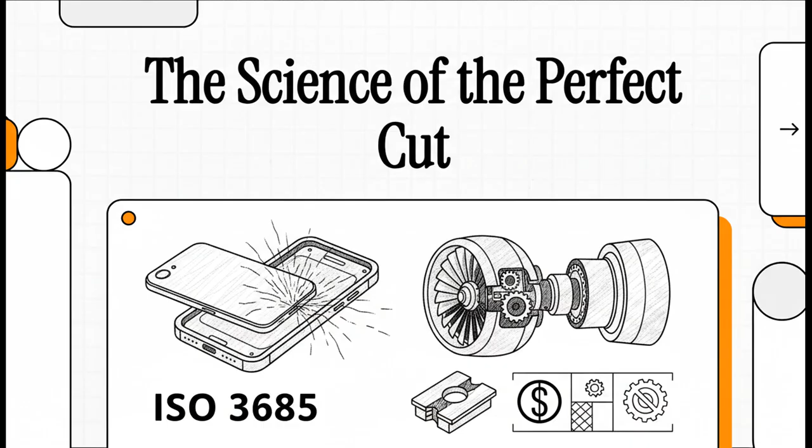So let me ask you something. Picture a huge, state-of-the-art factory. Robots, machines, everything humming along perfectly, making thousands of parts an hour. What do you think is the one thing that could bring that entire multi-million-dollar operation to a dead stop? A power outage? Maybe a massive software bug?

Well, the answer is actually way, way smaller than you'd think. It's a tiny piece of metal. Yep, a single cutting tool that fails at the absolute worst moment. And believe me, that one tiny failure can cause some seriously massive problems.

And this gets to the heart of the issue. When a tool fails unexpectedly, it's not just some small inconvenience. No, it's a full-blown disaster in the manufacturing world. We're talking about incredibly expensive parts getting completely ruined. We're talking hours, sometimes even days of downtime that costs a fortune, and a real hit to quality and safety.

So, how in the world do engineers fight back against that kind of chaos? Well, they use a rule book, a common language that lets everyone, no matter where they are, stay on the same page. And that language, that standard, is ISO 3685. It's the international playbook for defining the life of a cutting tool.

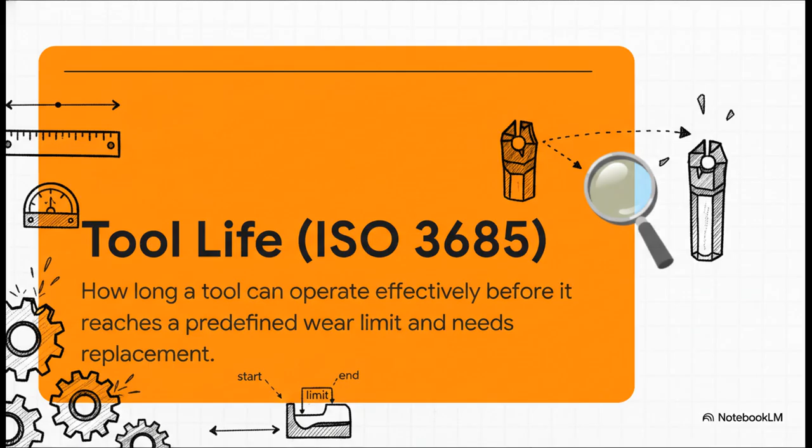So what exactly is tool life according to the standard? Well, think of it this way. It's the measured amount of time a tool can do its job right before it gets too worn out to be effective. And the key part here is that worn out isn't just a feeling or a guess. It's a very specific, predefined limit. And that is what allows engineers to make fair, apples-to-apples comparisons between any two tools anywhere on the planet.

So how do they actually measure this stuff in the real world? Well, they can be pretty straightforward, just timing how many minutes it's been cutting, or maybe they'll measure the volume of metal it's removed. But to get really scientific, engineers measure the physical wear and tear on the tool itself. They look at something called flank wear, which is kind of like the sole of your shoe wearing down, or they'll check for crater wear, which is where the top surface starts to get hollowed out from all that intense heat and pressure.

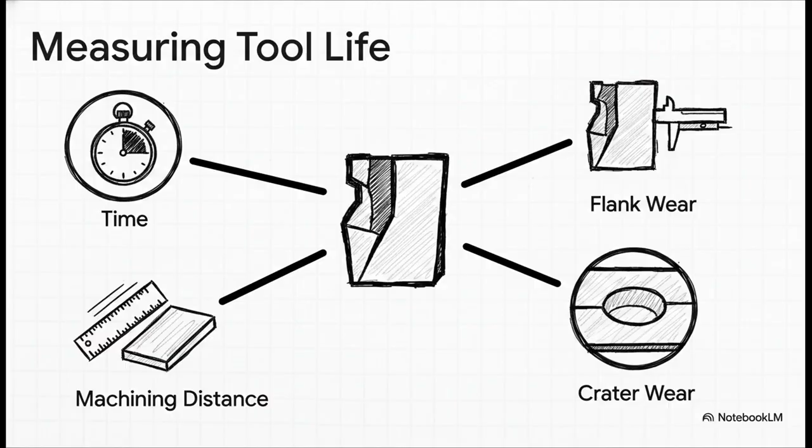Okay, so this is where it gets really interesting. Why does a tool wear out? It's not just one thing. Imagine you're in front of a big control dashboard with all these different levers and dials. Engineers have to get that balance just right to squeeze every last second of life out of their tools. And it really all boils down to a handful of key factors.

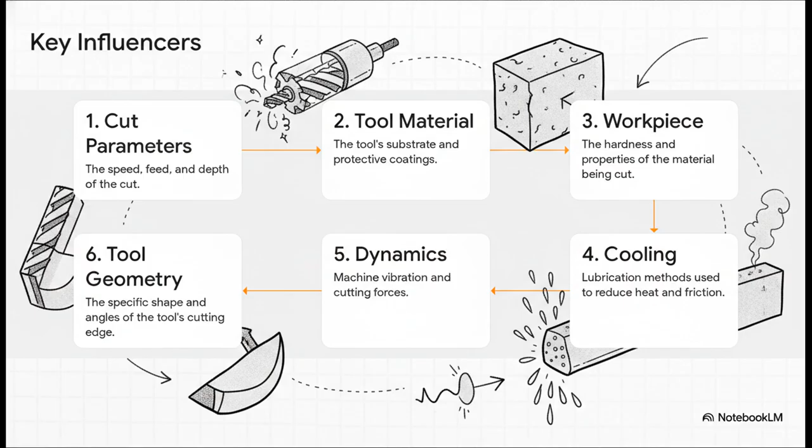You've got the basic physics of the cut itself, how fast you're going, how deep you're cutting. Then there's the material science part of it, what the tool is made of, what you're trying to cut. And finally, you have the whole environment, everything from coolants and lubricants to machine vibrations and even the super precise shape of the cutting edge.

Now, of all those factors, cutting speed is the absolute heavyweight champion. There's no getting around it. It's a simple, brutal trade-off. The faster you cut, the more heat you generate, and more heat makes the tool material get soft and wear out exponentially faster.

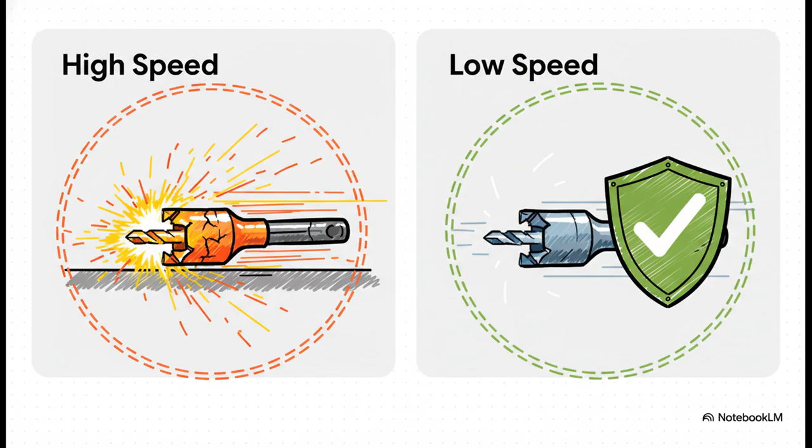It's this constant battle between trying to be productive and trying to make your tools last. So how do you possibly fight back against all that intense heat and friction? With some amazing material science, that's how.

Modern tool coatings are basically high-tech armor for the cutting edge. We're talking about these ultra-hard ceramic layers, things like titanium aluminum nitride, or even advanced nanocomposites that create this incredible thermal and chemical shield. These coatings can seriously extend a tool's life, even in the absolute toughest conditions.

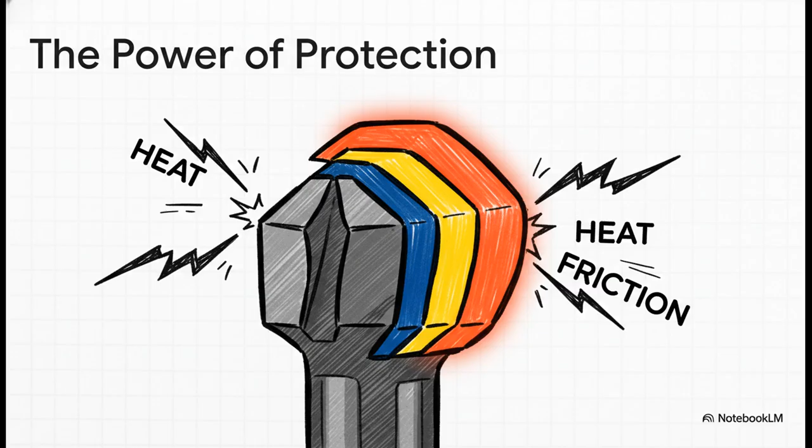And those tough conditions, they're becoming the new normal. Why? Because the materials we're building things with for aerospace, for medical implants, for high-performance cars are getting crazier and tougher every day. Trying to machine a super alloy like Inconel 718 is like trying to carve a diamond with a butter knife. It puts an unbelievable amount of stress on the tool, which makes managing that tool's life absolutely critical.

And all of this brings us to the modern era of manufacturing. We're finally moving away from just reacting, waiting for a tool to break and then fixing it. Now it's all about being predictive. It's using data to know exactly when a tool is about to fail. And sometimes it all comes down to a single number.

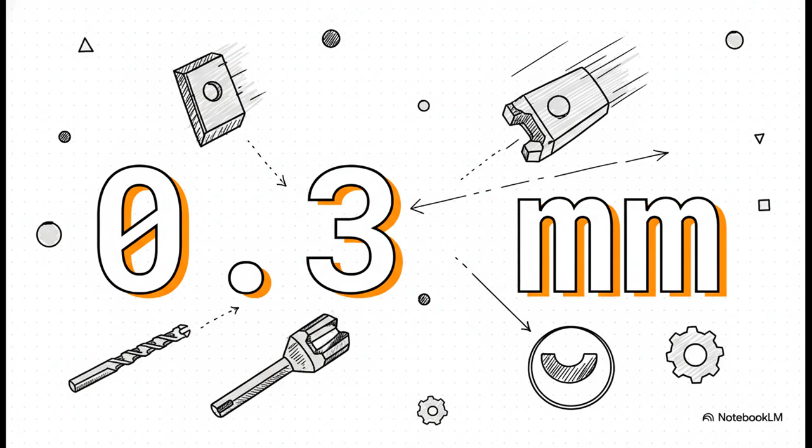For a lot of the common tools out there, this is the magic number, 0.3 millimeters. That's the typical amount of flank wear that basically screams, hey, this tool's life is over. Once it hits that tiny limit, it is time for a change. So how do you track that wear down to the millimeter without stopping the machine to look? You do it with a predictive pipeline.

First, you have sensors on the machine that are constantly listening, collecting data on force, vibration, and heat. Second, you have AI models that sift through all that data, and they can spot these tiny little patterns, like a slight change in vibration, that a human would never, ever notice. These are the telltale signs of failure.

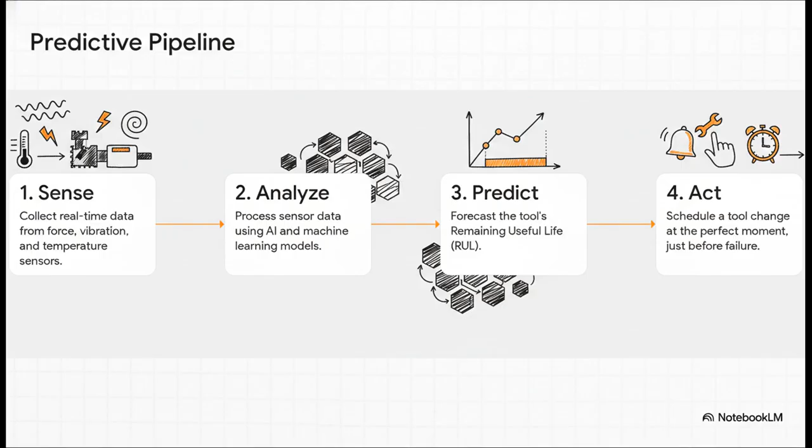Third, the system uses those patterns to predict the tool's remaining useful life. And finally, it tells someone to make the change at the absolute perfect moment, not a second too early and definitely not a second too late. And listen, this isn't science fiction. This combination of the ISO 3685 standard and artificial intelligence is what is shaping the smart factory of today and, for sure, the factory of tomorrow.

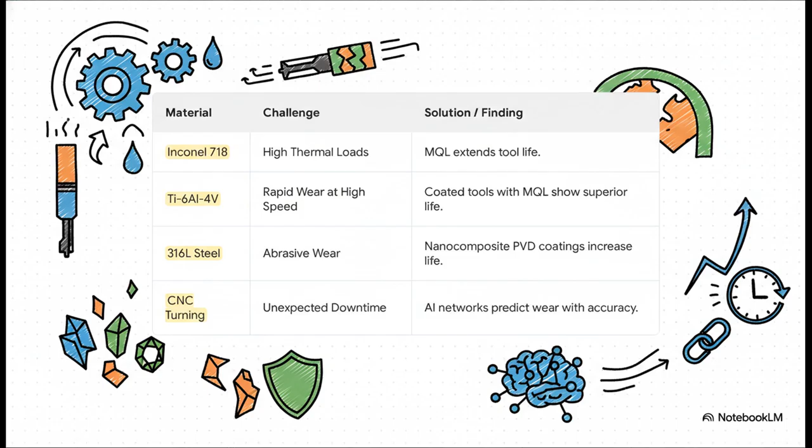And the results? They speak for themselves. Just look at some of these real-world cases. When you're machining tough titanium alloys, if you combine the right coating with just the right lubrication, boom, tool life goes way up. For stainless steel that just wants to chew up your tools, those nanocomposite coatings we talked about make a massive difference. And you can see that across the board. AI models are proving they can predict wear with incredible accuracy, stopping that million-dollar downtime before it even has a chance to happen.

So here's the big takeaway. The future of manufacturing isn't just about making stronger tools. It's about making smarter tools. By bringing together sensors and AI, factories are hitting a level of reliability and productivity that was just, well, impossible before. Which really leaves us with one final thought to chew on.

As these systems get smarter and smarter, constantly optimizing every single cut based on live data, who's actually making the decisions? In the factory of the future, is that perfect cut going to be the work of a skilled machinist's intuition, or will it be the cold, hard, perfect logic of an algorithm?